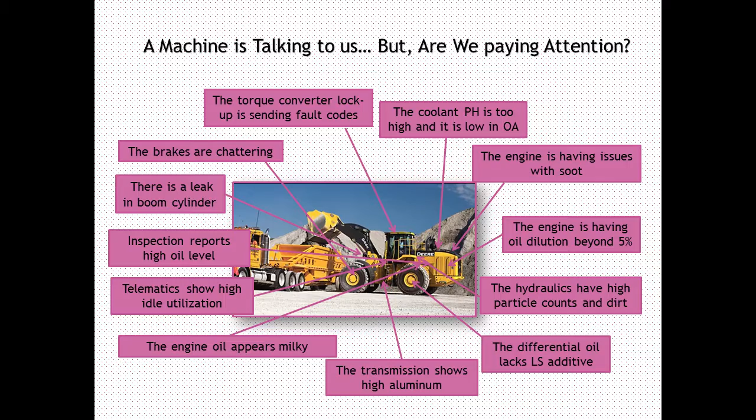My agenda today is to show you the changes in technology and how fluids have changed as well, and show you that fluid analysis is a very underutilized tool. I suspect everybody in this room uses fluid analysis. Is that the case? Are you satisfied with what you get from it? Are you getting your money back from fluid analysis? It's a powerful tool, but we are not getting the money back, and I'll show you why. My expectation is that you get acquainted with these changes, measure the challenges, and when you go back, try to implement some of them and figure out how to get better results from your fluid analysis.

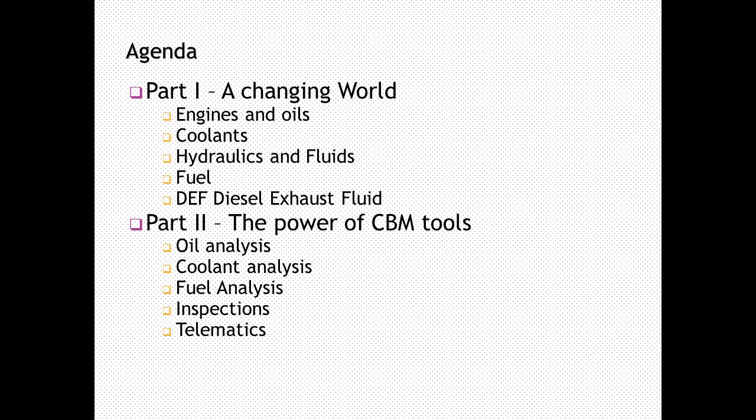The first part will show you the changes in engines and oils. I'm going to talk a little about coolants, hydraulics and fluids, fuels, and very little about DEF because there aren't a lot of issues to talk about there. My second part will show you the tools: oil analysis, coolant analysis, fuel analysis, inspections, and how to cross that with telematics. So what has changed in engines?

Let's talk about engines. We're right now in Tier 4, and over the last 16, 17 years we have seen changes manufacturers thought it was impossible to accomplish. The first stages of changing engines into emission engines were very scary, but manufacturers learned, and today they believe they can do it much better. Most of them started by moving the first piston ring to the top of the piston to eliminate empty spaces that produce emissions in the combustion. The same pistons were later manufactured of two different metals to resist the heat being generated.

Then we learned about the cool EGRs. EGRs are supposed to get some of the exhaust gases back into the engine, so we reduce the amount of oxygen. With this, we accomplish less nitrogen oxides. And then it needed to be cooled, so you recover the air mass and recover the power for that engine.

Then we had variable geometry turbochargers replacing wastegate turbochargers, just to provide enough air at different engine speeds, as well as twin turbochargers. Then fuel filtration—fuel is being injected at high pressures, so you needed to clean to very small limits. Then you have series turbocharging to really improve the amount of air provided to the engine at different speeds. Then you have the high pressure common rail that injects fuel at pressures 12 times higher than maybe 20 years ago, at very high speeds.

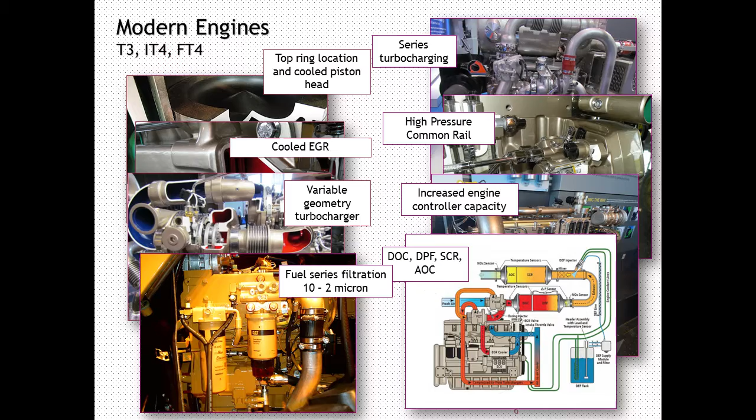Then you have increased power and controller capacity. Thanks to controllers, you can do a lot with pilot injection, ramp-up injection, and multiple injections. So you are squeezing the power of those engines using all kinds of tricks and devices. We are asking those engines to burn faster and still produce the same power, but with an exhaust that's cleaner than the air they suck in. Finally, the addition of diesel particle filters, catalysts, and after-treatments makes those engines extremely complicated, and we'll see why this also makes maintenance more difficult.

Pilot injection is feasible thanks to electronics, and what the industry is looking at is producing stoichiometric combustion, where you don't have a lot of fuel left or too much air unused. You have a perfect match of air and fuel, and for that reason engines run much hotter now, but much cleaner. Engines breathe better through additional valves, revised camshafts, and better turbochargers. So the room for mistakes has narrowed.

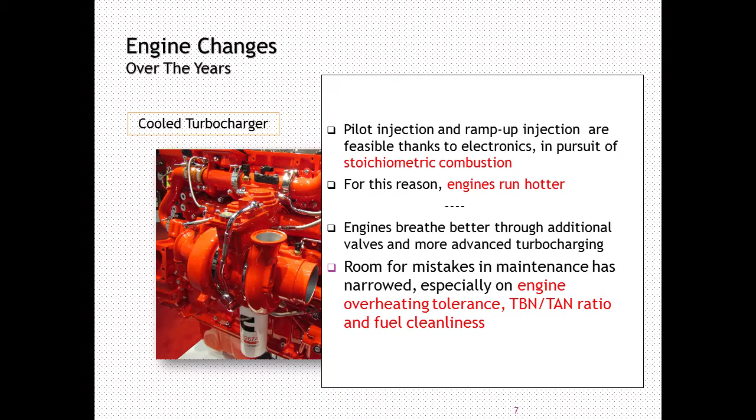We don't have a lot of room, especially on temperature. The overheating tolerance is minimum today compared with the past. TBN on the oil versus TAN has narrowed, they are running very close. And fuel cleanliness, we have no option but to run very clean fuels.

Fluids have changed as well in order to cope with these changes in engines. Oils contain less TBN and still need to protect the engine, be stable, and provide oxidation resistance. Oil has been used, and is being used, as a coolant. These new engines have almost double the amount of flow in the oil. The sumps are larger, the oil pumps are larger. We're using oil as a coolant.

Coolants, because of the added heat, needed to be different. Now organic acid coolants are the norm. And fuel is injected at very high pressures and at speeds that exceed more than 1,250 miles per hour.

Can you imagine that? So what injector is going to resist that? If you have any contamination at those speeds and pressures, you cause erosion. You also have high temperatures, which cause carbon deposits and varnish. All those challenges mean fuel needs to be extremely clean, more than hydraulic fluid.

Dilution could happen. Fuel dilution is a byproduct of technology. You cannot avoid it no matter what you do to your engine. And fuel relies on additives to protect the injector and the injection system. Not in the past -- in the past we ran fuels without any additives almost. Today, we depend on additives. And soot could be also a byproduct, depending if you work at high altitude.

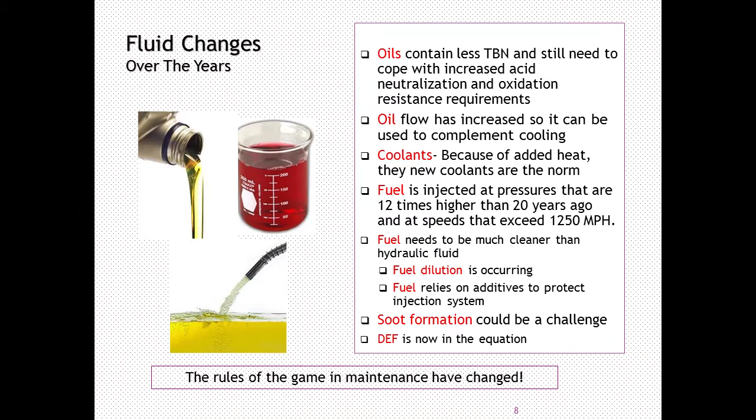So the rules of the game in maintenance have changed, and sometimes we forget about it and we keep doing things like in the past. DEF, diesel exhaust fluid, is also in the game, and we need to think about it.

When you talk about oils, the TBN has dropped. Oils today have less TBN, and we're supposed to change oil before the TAN, or acid number, exceeds the TBN. So new oils have less TBN, so we have less room apparently. But remember, fuel now has only 15 parts per million in sulfur, so we compensate on the other side. Basically, you can run the same hours with the same oil today thanks to that new fuel. But since these new oils start with much less TBN, today we have 9 TBN with the new oil compared to the old ones at 12 or more.

You have to keep an eye on the TAN, because if the TAN exceeds the value of TBN, you will have metal generation, and you'll scratch your head wondering where this metal is coming from. Why is that happening? There's no dirt, there's no fuel -- what's causing that? You need to check TAN. And TAN was reserved only for hydraulics. Well, now you may have to use it for engines as well. That's the new game.

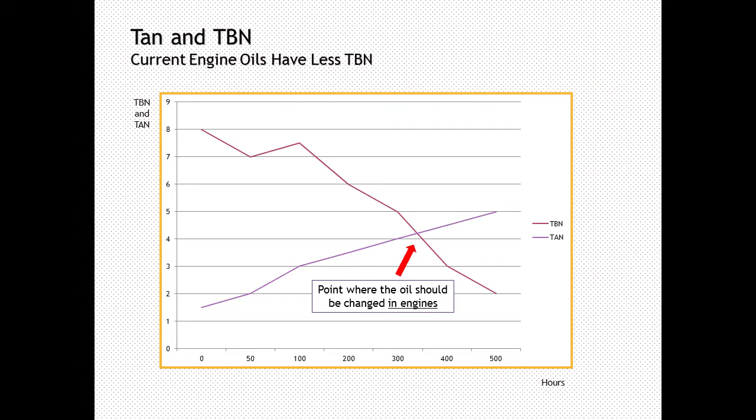When we talk about coolants, nitrite-based coolants were okay in the past, and helped us run heavy-duty engines and protect against cavitation. It worked with an anodic principle, where we created that yellow stripe protection for the liners. Well, that's not good enough with current engines.

We need to go to organic acid coolants, which we call cathodic. What it does is transform the ions, change polarity, and use those ions to patch the holes -- like when you patch potholes in the roadway during winter, they're patched in the liner like that. So new coolants provide that protection.

The question is, can you mix them? My advice is don't mix them, because you diminish the protection of the new coolants. It's better that you adopt the new coolants for the whole fleet.

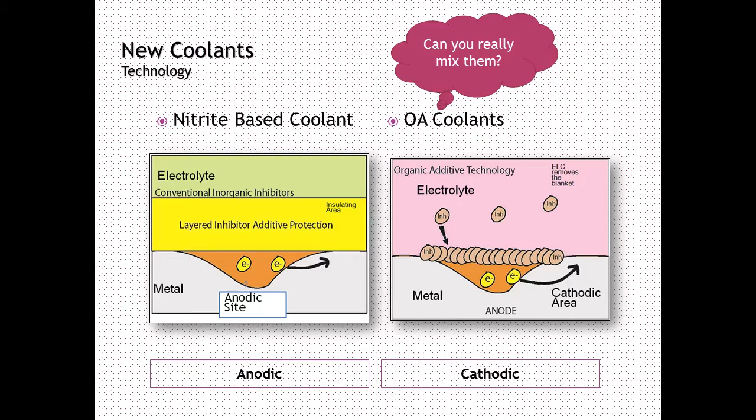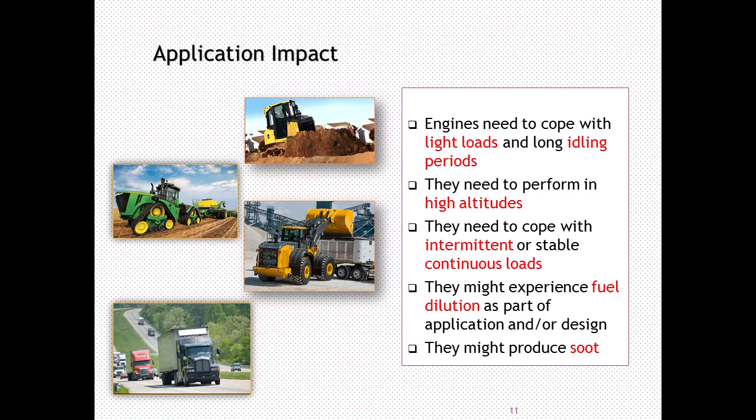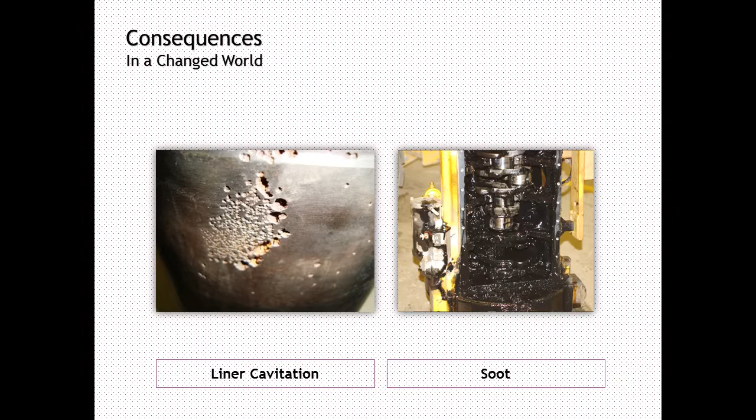Or you could have soot, like the pictures are showing. You could have piston delamination from high heat. Delamination doesn't happen every day, but if you have a plugged air filter, you increase the temperature in the combustion chamber, and you could cause issues like piston delamination.

Injector failure by carbon buildup or varnish is part of the game. If you remember the temperatures, if you don't use any additives, that could happen. Injectors are not lasting like in the past.

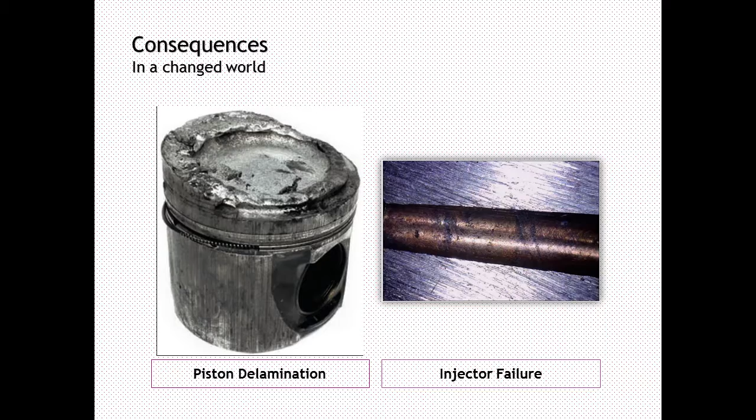So what are the areas we need to look for in engines? Temperature is a critical one. Air filters, we don't have room for dirty air filters anymore. Check for TBN and TAN. If you don't use TAN today, try to use it because you are going to need it.

Coolant types, remember the new type of coolants based on organic acid, long life coolants. Water hardness. Remember, the water we drink is good for human consumption. It's not good for engine consumption. If you test this water, it will have a hardness that is not good for the engine. We assume everybody is using pre-diluted coolant, but if you mix it locally with water from the tap, you are not helping your engine to survive.

DEF quality and contamination. We have to keep an eye on the DEF quality fluid you use and whether or not you have mixed it with fuel or coolant.

Fuel type, we mentioned that, I'll talk more about it. Watch for fuel dilution, coolant leaks, soot and dirt contamination. Especially coolant leaks are bearing killers. Coolant is the worst contamination you can have in an engine because you can lose an engine very fast. Watch for critical metals generation and watch for acid number.

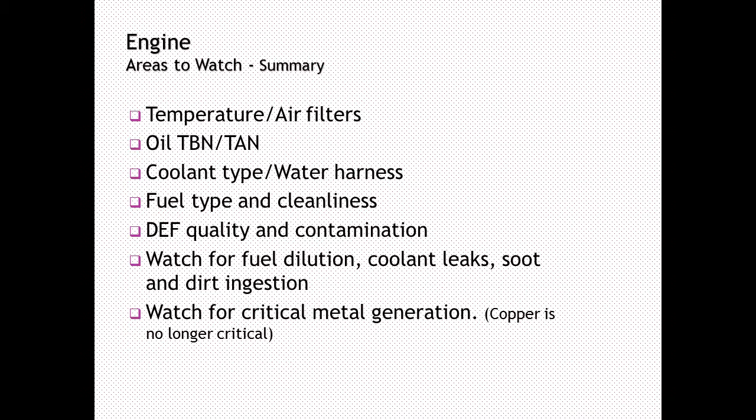Now, I'm going to switch gears to pass to hydraulics. I'm going to discuss it similarly with the changes in hydraulics. We don't talk about Tier 4 hydraulics, but hydraulics have changed anyway. And the changes are that we use smaller reservoirs. That's the fact. We need space in machines, so smaller reservoirs.

And what's the problem with a smaller reservoir is that you have less time to release the air and less time to cool the fluid. But we also have electronic controllers in hydraulics that follow the torque on the engine very closely. It means that the hydraulic system really sucks the whole power available from the engine.

High pressure tandem pumps are running at very high pressure, over 6,000 PSI. What happened with that? The competition to have the strongest machine in the market, the strongest arm and boom that can break the soil very easily, put a toll on arms and structures. So the key is making the arm last longer with those powers. It's a challenge for manufacturing because hydraulics are so powerful that keeping arms from breaking is becoming a challenge.

The use of attachments like hydraulic hammers is very popular. Remember, if you use the same hammer with different machines that use different fluids, you are already cross-mixing them, causing issues to both machines. And hammers are usually left in the open with the hoses on the ground without protection on the connectors.

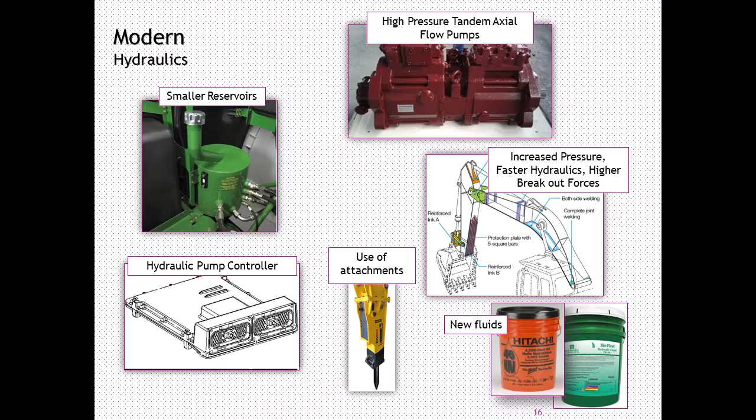So what things do we see in hydraulics? Increased pressures, smaller reservoirs, more environmental concerns with fluids, electronic controls, more power, and the room for mistakes in hydraulics has also diminished. We don't have a lot of room. These systems do not allow fluid cross-contamination. If you mix two different kinds of fluids, you will have to pay for it.

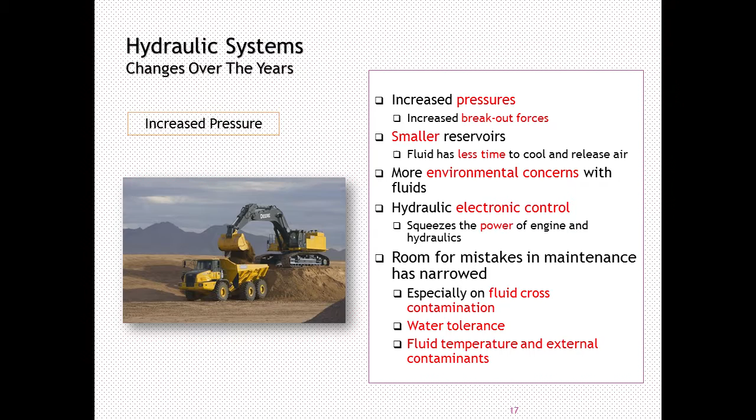Water tolerance in these pressures is minimum. Running at 6,000 PSI and close to 120 Fahrenheit, if you have a little water, more than 1,000 parts per million, you have a challenge with your pump. You have to watch for temperature as well as for water content.

These fluids I just mentioned need to release air in the time they have. The fluid usually stays in the tank only 20 seconds, so it changes the complete volume in 20 seconds. You need time to release air and time to cool it, so you need to keep radiators very cool and very clean, because of the high pressures and closer tolerances. The fluids need to resist those temperatures, and if you mix them, you are changing the nature of those fluids and creating a new product.

New fluids are becoming the norm in certain areas. They require biodegradable fluids, and biodegradable fluids are very tricky to handle. They take water easily, and it's hard to keep water out unless you use a bypass filtration.

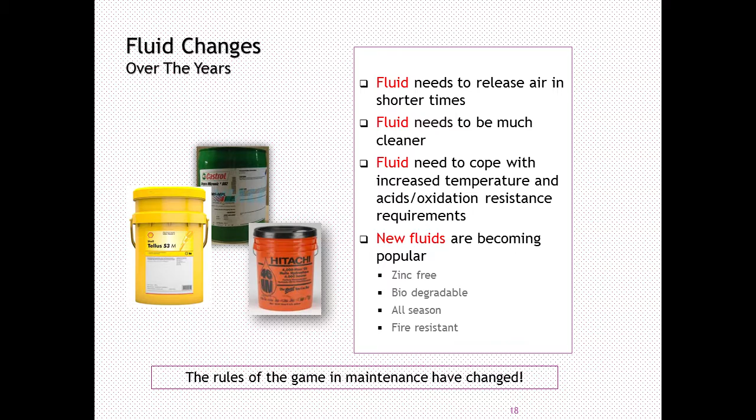There are zinc-free fluids today. They are biodegradable, they are all-season fluids, and they are fire resistant, and there are even more types of fluids being used.

When we talk about viscosities, machines can run on any kind of fluid, but the limiting factor is temperature and the season. Engine oil works, but engine oil is very heavy, and in cold weather it doesn't work.

Engine oils also lose viscosity very fast. You can have challenges with cold weather when you use engine oils or tractor fluids. So hydraulic fluids like 46 or 32 are very popular because they are very stable in viscosity loss, as the graphic shows.

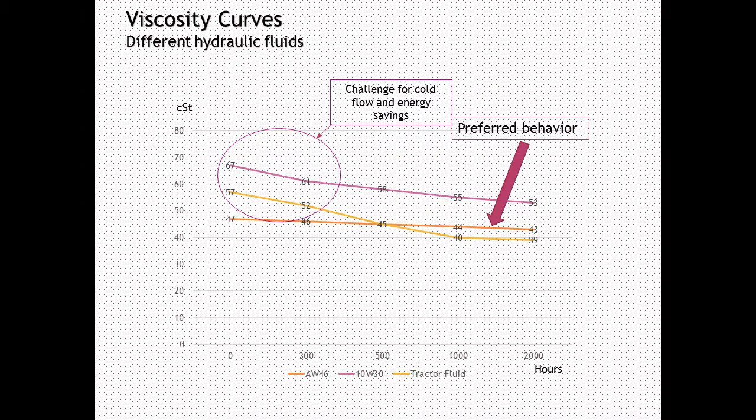When we talk about application in hydraulics, they need to perform in very cold weather, like the northern part of the United States, Canada, or Alaska. They need to cope with high loads.

They need to cope with humid conditions. If you do dredging or work close to the sea, you have to have a system that can handle hydraulic attachments like hammers, but also corrosive environments like you see in that last picture.

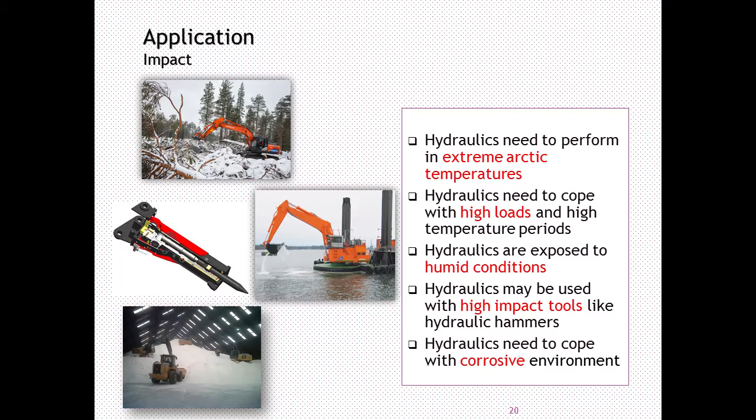All of those environmental situations get into the hydraulic system through the cylinders. No matter how sealed they look, you will get humidity and contaminants within the system.

You need to protect the heart of your system, and the heart of your system is the hydraulic pump. Hydraulic pumps usually have bronze alloys, and they can fail for many, many reasons.

At least I can list 12 reasons. So when you look at your oil analysis, look at copper generation, because that is the heart of your system.

In this picture, I'm showing a failure by etching produced by the lubricant, a lubricant that's very aggressive for the fluid. In the right picture, you have pitting produced by water. So they look alike, but they are different.

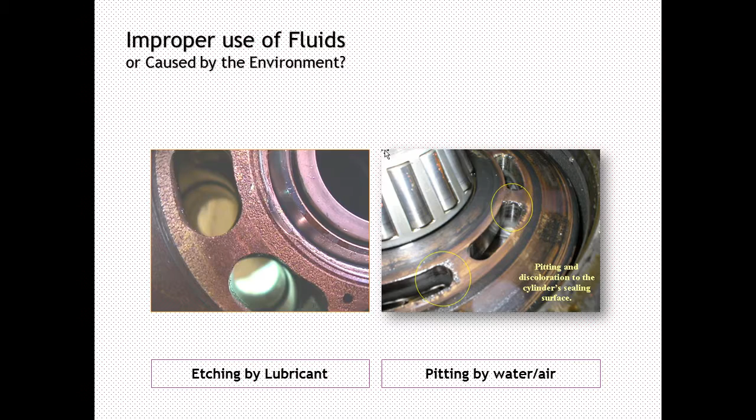As said, there are at least 12 reasons to produce copper, and copper is coming from the pump. So when we look at areas we need to be keeping an eye on in hydraulic systems, watch for mixing—don't mix fluids—watch for the signature in oil analysis, watch for copper readings because that's the life of your system, and watch for water using the Karl Fischer test.

I'll talk a little bit about that later. And be careful with attachments, especially hydraulic hammers and compactors, because of cross-contamination.

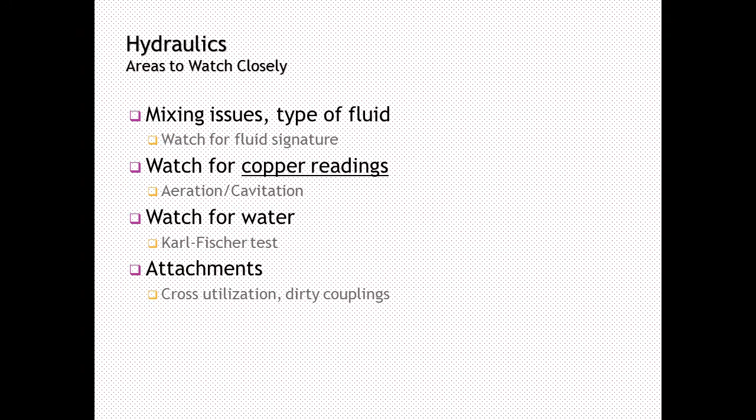Let's talk about tools. But the first thing about oil analysis is standard deviations. If your lab has not calculated your wear tables, what you're getting is perhaps too many warnings.

Or maybe you are not getting enough, but you are not getting the right amount of results. The median values in the calculation of standard deviations—Excel sheets can do that for you, but your lab should provide you wear tables based on the standard deviations.

In the example, 68.27% falls within one standard deviation, one plus and one minus, in total two standard deviations. That's how wear metals behave.

They produce that curve, that's a parametric curve, and usually we use that kind of calculation for wear metals. Other indicators are not used or calculated that way—only wear metals.

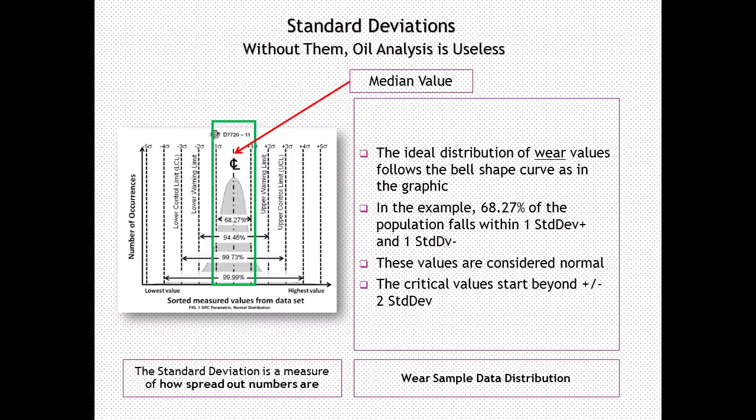And what happens if you don't have tables? Every machine is different. Even if you have machines working side by side, if they don't have the same engine, working the same conditions, doing the same stuff, you may need different tables. I mean, they are not identical engines.

Engines have different oil sump capacities, different kinds of injection, different controllers, different camshafts. So if your lab is using one single table to judge your whole fleet, it means you are not getting back your money for your oil analysis.

In this example, I have two machines, an 800 Hitachi and a 270D John Deere. The numbers are different—if you look at the numbers, iron is totally different, lead, copper, all of those are different. That's why different machines require specialized and individual tables.

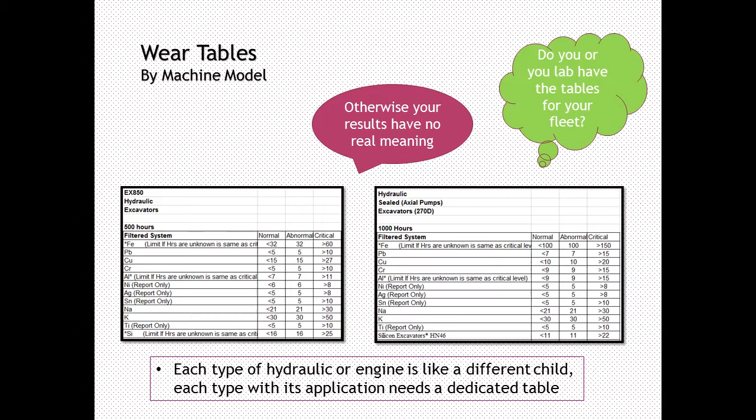Your lab needs to calculate those for you, or you won't get your money back, and the numbers mean nothing to you. You may be worrying too much, or maybe you don't get the right report when you need it. So my advice is: does your lab have those tables calculated for you?

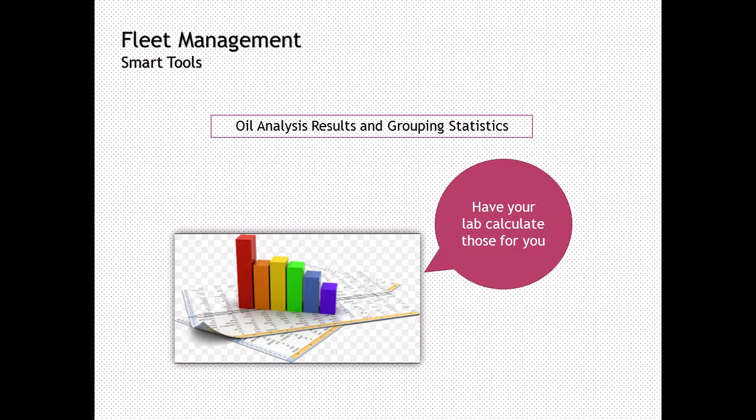When you have the oil analysis results, your lab can group them by critical, abnormal, or normal—different types of warning levels—and that allows you to address the ones that really need care. But you need to calculate your tables and have them ready for you. Otherwise, oil analysis won't work for you.

In this example, this is an engine with oil results showing a coolant contamination. I know that's a coolant because of the constituents—you have sodium and potassium, sometimes silicon from the coolant.

I know there is coolant, so the labs know about this, but sometimes it's more complicated than that. Labs are limited by the time they have to give you results. A lab analyst possibly makes a basic salary and is allowed 40 seconds to test and give a report. So how much are you going to get? You pay around $10-12 per oil analysis, and you have a guy with only 40 seconds to give you results. He's not going to spend a lot of time analyzing your results.

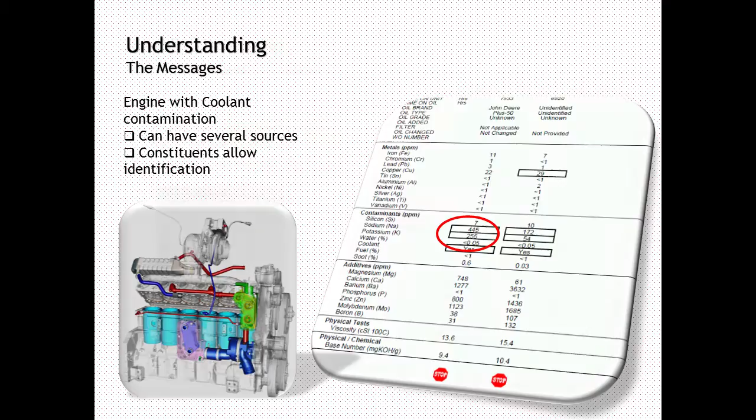Oil analysis is a powerful tool. I know there is coolant in that sample, but I can also know where the coolant is being leaked. I can find the source of the leak with oil analysis. In this example, there is a coolant leak, and I also noticed that the copper is minimum. That tells me the leak is possibly through liner pitting, not through the oil cooler. So oil analysis is a very powerful tool.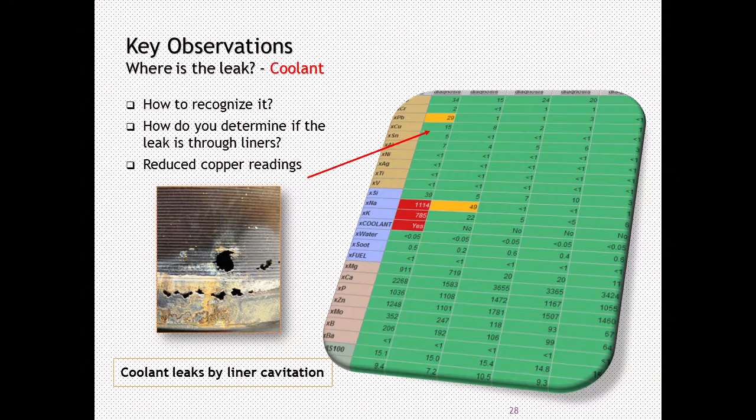So oil analysis can do much more than you can imagine, but it's a tool that requires a lot of knowledge. I don't know if the labs are going to develop the knowledge, but you have an option - you can develop the knowledge yourself.

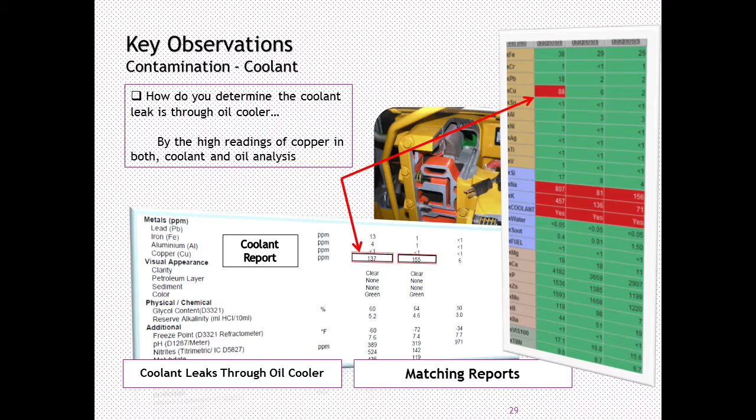Determining if you have a coolant leak, the question is: is it glycol or is it not glycol? Because coolant is made of sodium and potassium, where sodium could be coolant, could be dirt, could be salt, and potassium could be coolant as well, fertilizer, or soap - where the answer is difficult, right? And you think for $10 your lab is going to tell you exactly what it is.

They know the basics, but they don't take the time to go through this flow chart. Through this flow chart, I can determine that that's in fact a coolant leak. I can determine if the leak is through the oil cooler. I can determine if it's through liner cavitation. I can do a lot of things with a flow chart, but it tells me step by step what those readings mean. If we jump into dirt, we'll have the same situation. So the sign down there is exactly what I tell you - they're not going to the trouble of interpreting this for you.

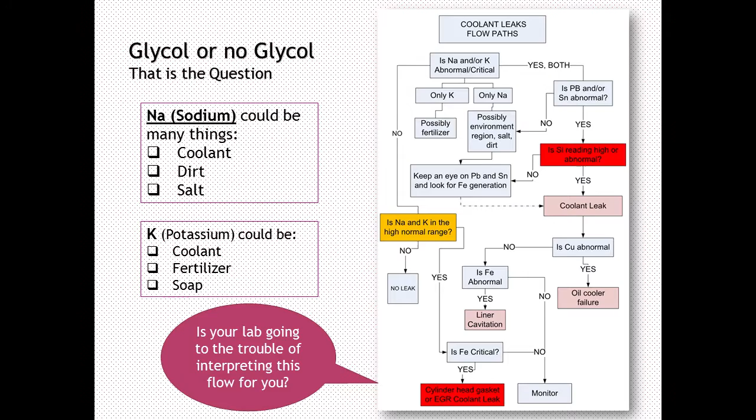The next one is dirt - dirt or not dirt. Dirt is represented by silicon and aluminum. But silicon could be dirt, silicon gasket material, anti-foam additive from the oil, or coolant silicate. So the interpretation becomes more difficult. And aluminum could be piston material, or it could be dirt. So how do you interpret the results?

Well, you also have a flow chart that can be used. A flow chart can tell me what this sample I'm getting is. Is it dirt? Is it gross dirt contamination? Is it silicate from coolant? Is it silicon from gasket material? Or is it a foam inhibitor? This flow chart helps me determine that.

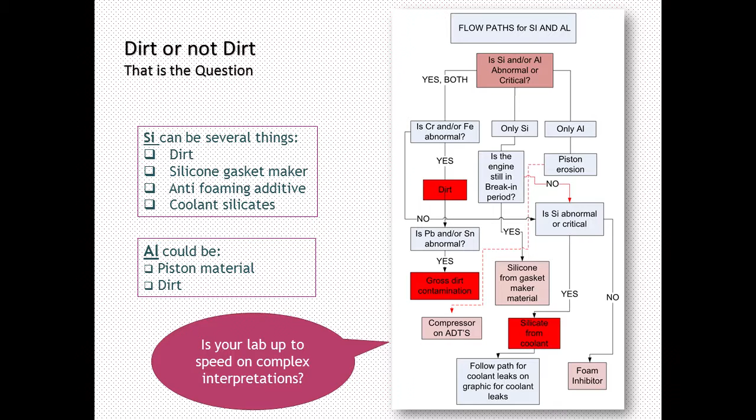I'm not trying to turn you into an expert oil analysis interpreter - I'm just showing you the power of this tool. So labs are not going to go into deep interpretations. A couple of them go beyond the call of duty and do a good job. Most of them are very precise in what they measure, but they don't have the time to go through this kind of explanations.

When we go to a hydraulic oil or hydraulic fluid analysis, there's a lot of things you need to know. Like in this example, is the copper reading normal? Is the silicon reading fine for this sample? If I don't have sodium, if I don't have aluminum or potassium, I need to know my fluid. That fluid on top shows it's a Shell Donax TD product, and I know it has a lot of silicon, which is a foam inhibitor.

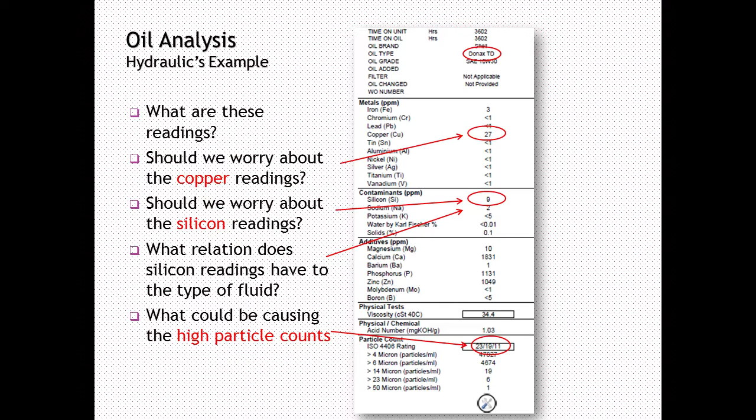Also notice that particle counts are very high. Why am I having high particle counts? If there's no dirt, why do I have high particle counts? So there's a lot behind the story, and we can know that particle counts are by themselves a whole science.

When you send your sample to the lab in a little jar, what you get back in metals and contaminants is only up to 6 microns in size - that's what the lab instruments can interpret. When you move up in size, they are hidden. You don't see them until they're big enough for the human eye to see, provided there's a good background. That's why we do particle counts, as you can see down there, because we can see from very small to very large with particle counts.

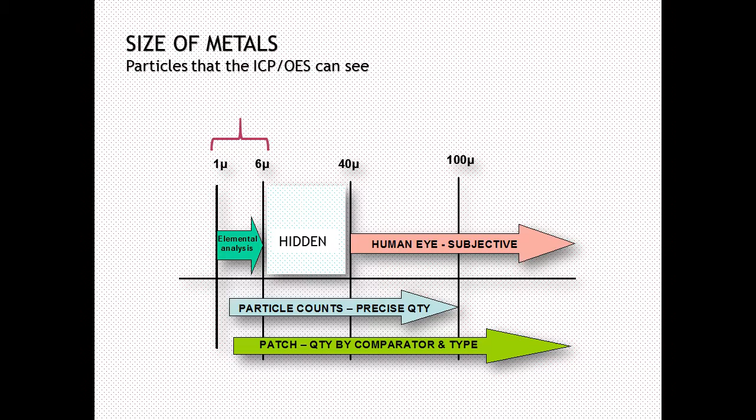Particle counts can be tricky because a mixed oil will have high particle counts, but you won't be able to interpret easily, because it's not dirt that's causing high particle counts, but gels. So this is the range of visibility to particles.

What about water? Water is very hard to see. Most labs offer the infrared test, and you pay for that. It's very cheap, but the visibility to water starts at 1600 parts per million with infrared. So if you have less than that, you don't see it.

And if you have a hydraulic pressure system at 6,000 psi, and you don't have visibility to water up to 1,000 parts per million, you are missing the boat. You are paying for nothing. You are not getting the visibility to the results. The Karl Fischer by co-distillation is the answer.

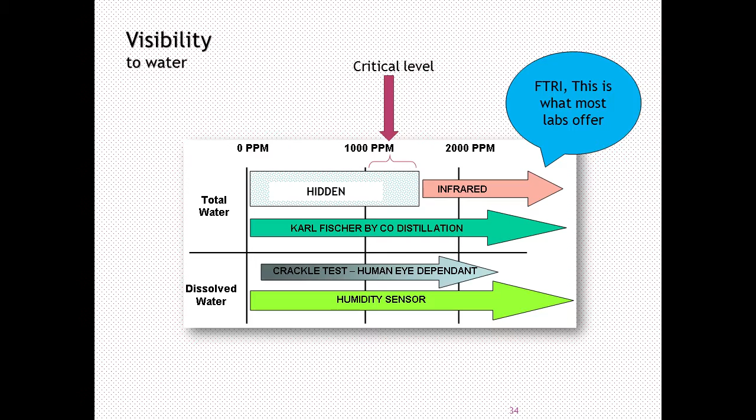Obviously, there are all the tests to check for water content, like the crackle test or the humidity sensor. But those are measuring only dissolved water, not total water. So Karl Fischer by co-distillation is the answer for that. Most labs use the infrared, and you won't have visibility. You are missing the critical level if you don't do Karl Fischer by co-distillation.

When we talk about dirt, dust, and water, this is an example, a hydraulic system where I have dirt confirmed because you have silicon, aluminum, and the ratio is 4:1, that is dirt. Also, in this sample, I have plenty of water. And if you don't have Karl Fischer, you won't see this water. That's the beauty of the Karl Fischer test.

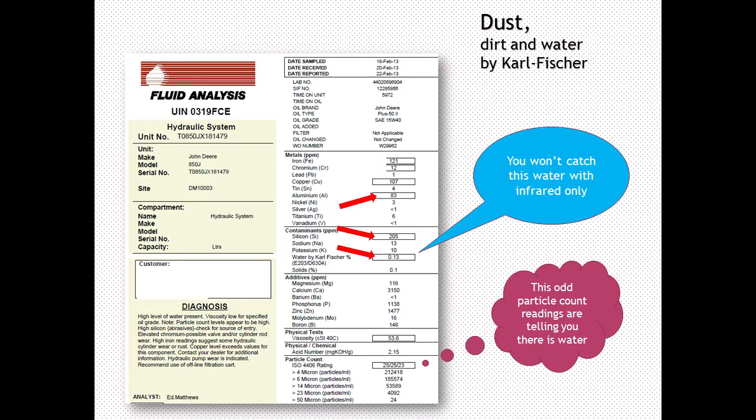And the high particle counts could be a mixing issue, or could be dirt. But particle counts are telling you, in this case, the numbers are 25, 25, 23, which is an atypical number, typical from a sample that has plenty of water.

When we talk about mixing or fluid compatibility, I have in that chart with colors: hydraulic fluid, zinc-free, hydraulic zinc base, universal tractor fluids, ATFs, engine oils in 2 different viscosities. As you can see, the no's are abundant. It's telling you you're not supposed to mix them. Remember, each fluid is developed through years of experimentation, and if you mix them, you create your own instantly, and it won't behave like you want it.

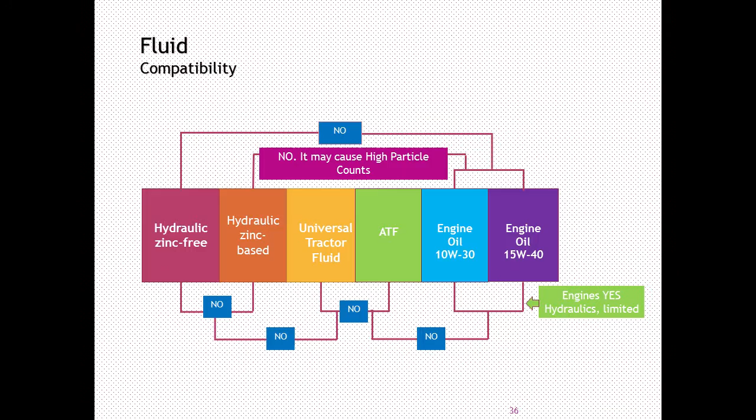When I talk about mixing, I mentioned the formation of gels. That's what happened - you create gels that reflect in particle counts. High particle counts could be gels, and the numbers are atypical. You can see this in 2 different fluids. I have examples of what you get.

When you have water, you have equal numbers. They are supposed to have 2 different code numbers and not 22, 22, 22. That's an issue when you have water in the mix.

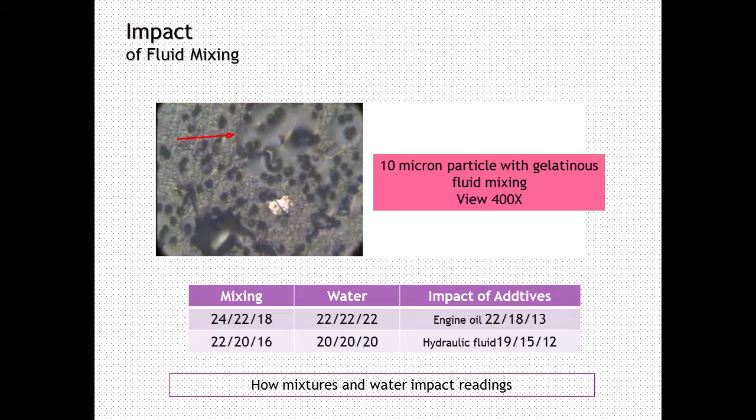Let's jump to coolants. This is an example of coolants. You have to measure your additives and you have to measure your water. This is a real example from a case I saw. This engine was suffering from corrosion, aluminum corrosion, and the results showed that he had no protection from the organic acid side of the results, and the pH was very high.

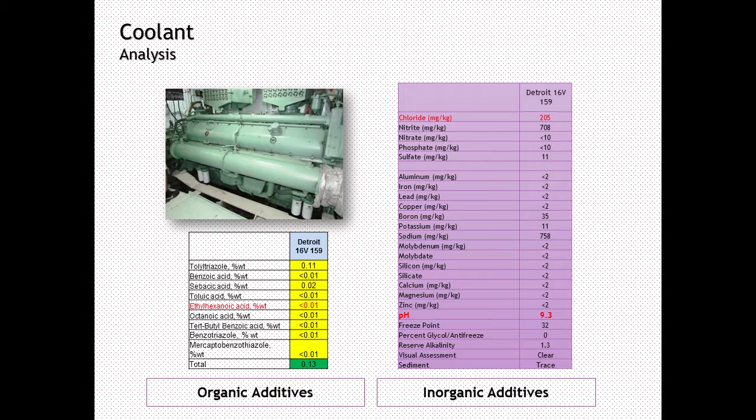The higher the pH, the more corrosive for aluminum the coolant is. So you have to test those, and you also have to test the water. I mentioned the water that we drink is okay for humans, but not okay for engines. Look at the results of that engine - the chlorates were very high as well. And if you look at the OEM versus ASTM specifications on what they want for chlorates, sulfates, and dissolved solids, those are the numbers.

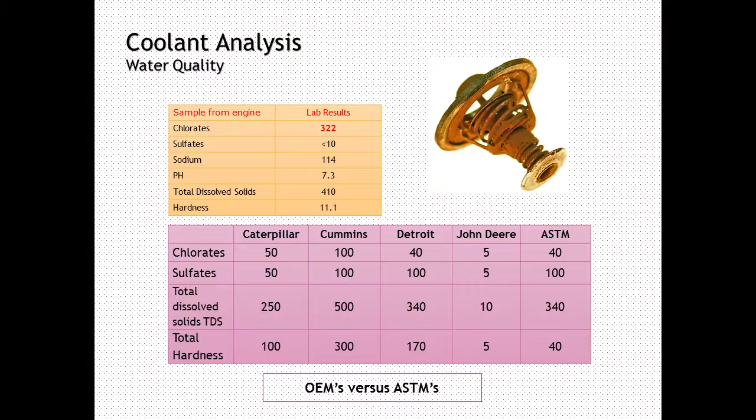And you can test those locally. I can test those for you in 1 minute with a 3-way stick, and they are very cheap. So you can test your water, but you can test your coolant with 3-way sticks, very easy, very cheap. And you know if you have the right concentration, if you have the right amount of organic acid additives, and if you have the right pH.

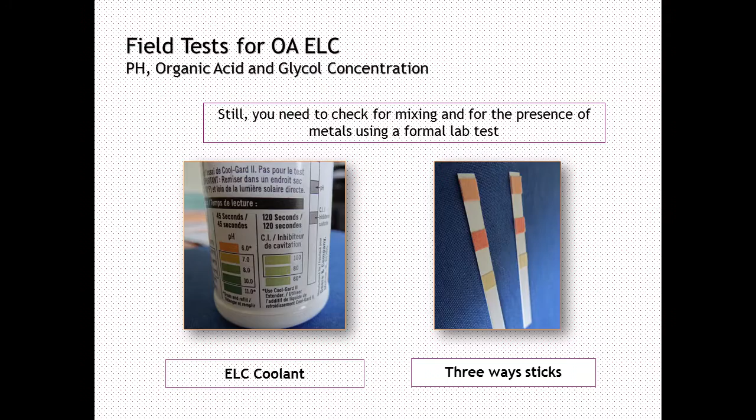When we talk about fuels, perhaps fuel samples are the worst investment because you don't get what you need. And the problem starts with yourselves, because when you send a sample, you send a sample that you took from the wrong place at the wrong time. And I'll explain it to you.

When you took your sample from your tank, your bulk tank, you need to take the sample at certain heights, and do it after refueling or not after refueling. If you do it after refueling, do it at the middle of the tank. But if you are not doing it after refueling, you have to do it at one-third below.

Otherwise, what you're sending to the lab could be crap. The lab will tell you this is good for nothing, or will tell you your fuel is clean. That's the problem. Catching the ghost, that's your task. Be able to catch a sample that is representative of what you're feeding your tractors or trucks.

With machines, what happens? The fuel gets cleaner as the machine works during the day, because 60% of the fuel that's not used by the injectors goes back to tank and is filtered again. So at the end of the day, the fuel in the tank is very clean. If you take a sample at the end of the day, what's the lab going to tell you? It's going to tell you that your fuel is very clean.

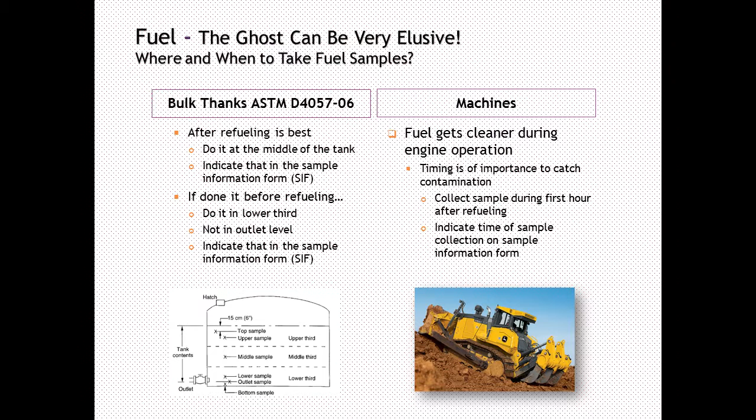But still, you have to do fuel analysis, because you could have bacteria, you could have a lot of particulate, you could have high sulfur fuels. It's funny, but high sulfur fuels still show up from time to time. You need to know your cetane index for easy starting in cold weather or high altitude, and you need to know how much biodiesel is in the fuel.

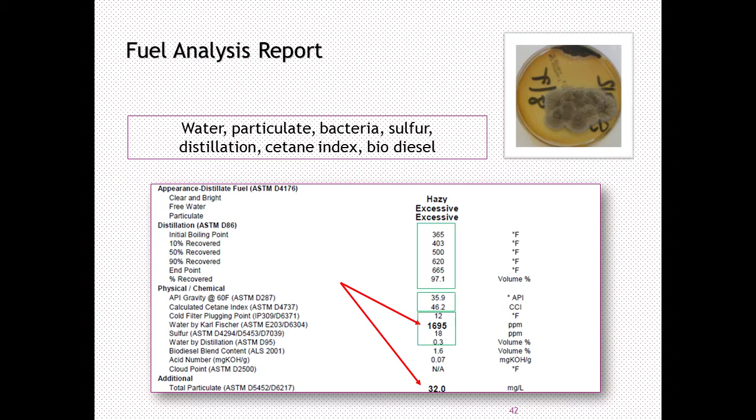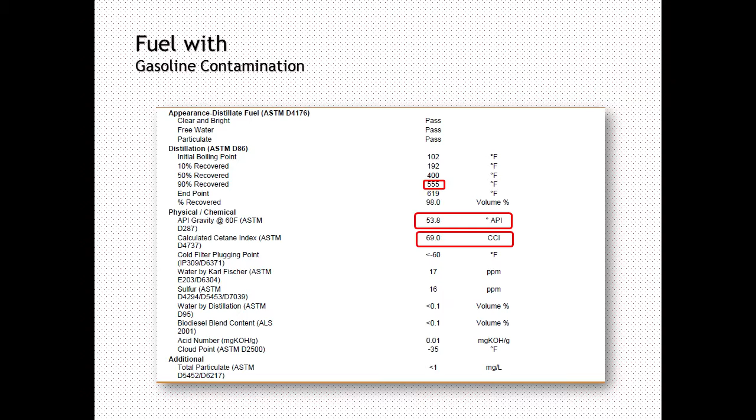You also need to know if you have a contaminated fuel. In this case, this fuel shows a cetane index of 69. Wow, with 69 you will burn that engine like a jet. That sample comes from a diesel fuel that was contaminated with gasoline.

I mentioned that fuels are no longer able to run by themselves. They need help, they need additives. You can have an additive that has lubrication and dispersion, oxidation inhibition, and all that. But you also have additives that are very strong solvents for engines that have already developed some kind of issue with injectors, for varnish or carbon deposits. Those strong cleaners help clean the injector, but think that an injector that's already giving problems is very hard to save.

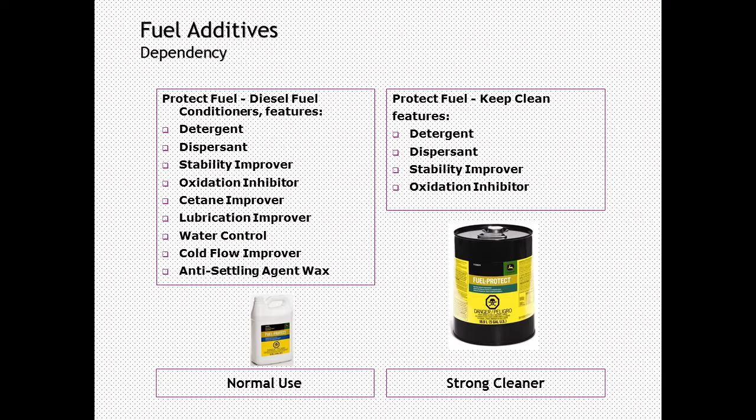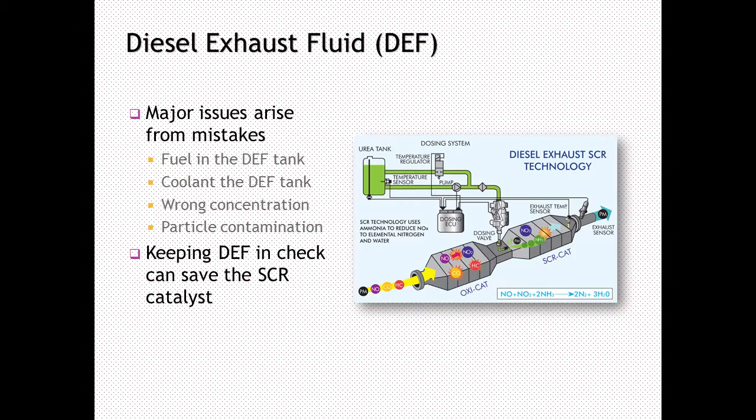When we talk about DEF, the diesel exhaust fluid, most of the issues come from mixing or filling the tank with the wrong fluid, but you could also have particle contamination. What happens with these issues is that it could be very costly, because it will poison your catalyzer. That's the issue with these mistakes.

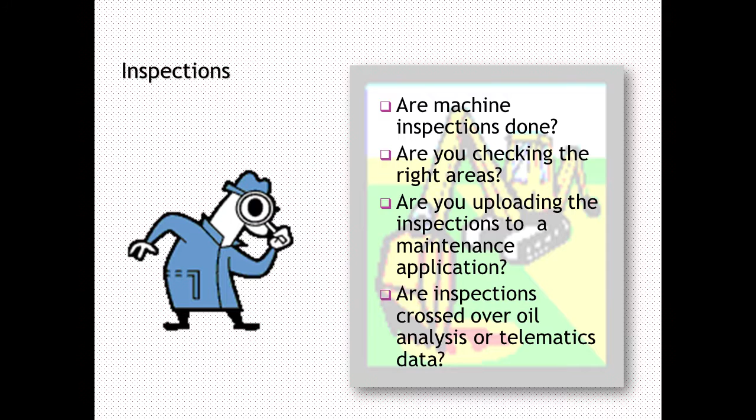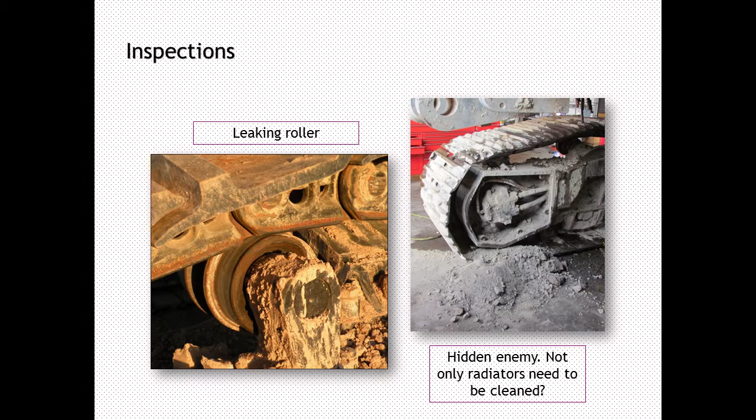Finally, inspections. Are machine inspections done in time? Are you checking the right areas? Are you uploading inspections to the machine maintenance application? Are inspections crossed over with oil analysis? Inspections are very powerful, provided we can interpret that and cross information. Like you have in these pictures, a leaking roller or a propel motor full of dirt. Those are reportable things that you need to know. The propel motor that's covered with dirt won't cool down as necessary, so that's a report that needs to be recorded someplace.

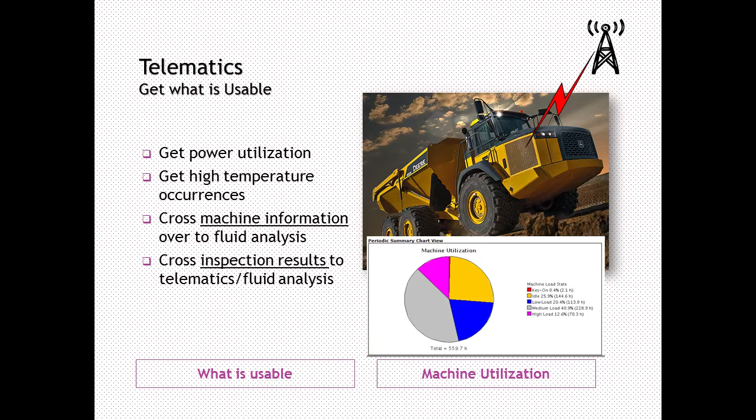And telematics. Telematics is very powerful. Get power utilization, get high temperature occurrences, and cross that information with fluid analysis. Cross inspection results, telematics, fluid analysis. Telematics is very, very powerful, provided we can interpret the data.

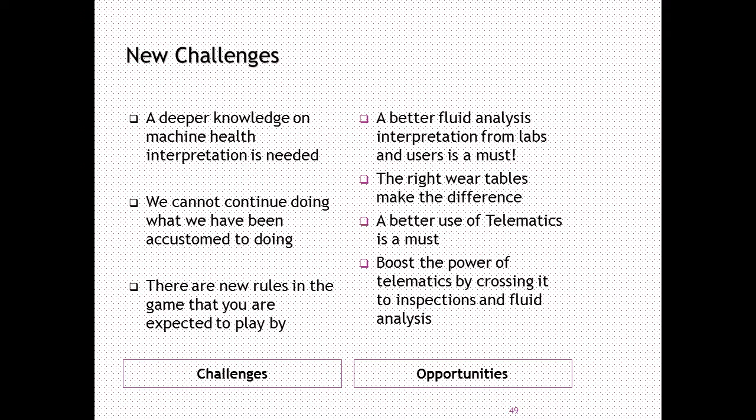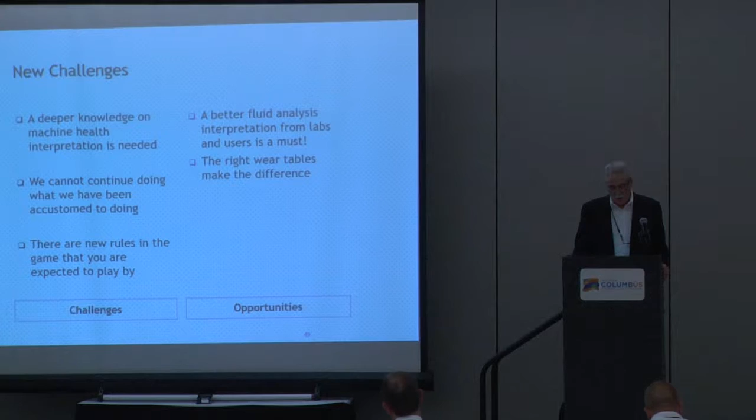So the new challenge is deeper knowledge on machine health interpretation is needed. We cannot continue doing what we've been accustomed to doing. There are new rules in the game that you are expected to play, and that's something we cannot change. The opportunity is that better fluid analysis interpretation from labs and users is a must. The right wear tables—think about wear tables, how to have the right tables that tell you the truth about your equipment. Better use of telematics, and boost the power of telematics by crossing it with inspections and fluid analysis.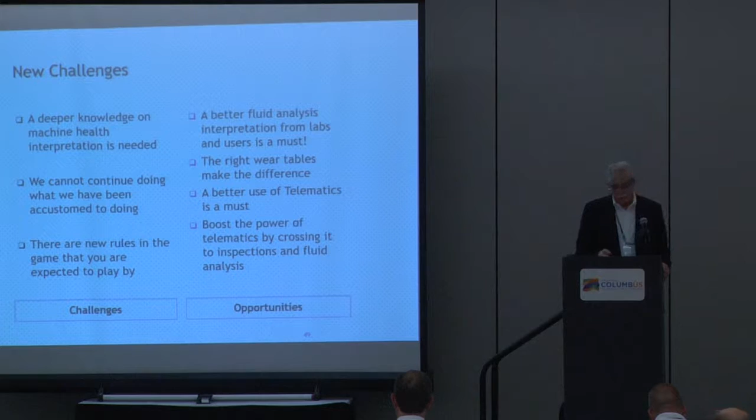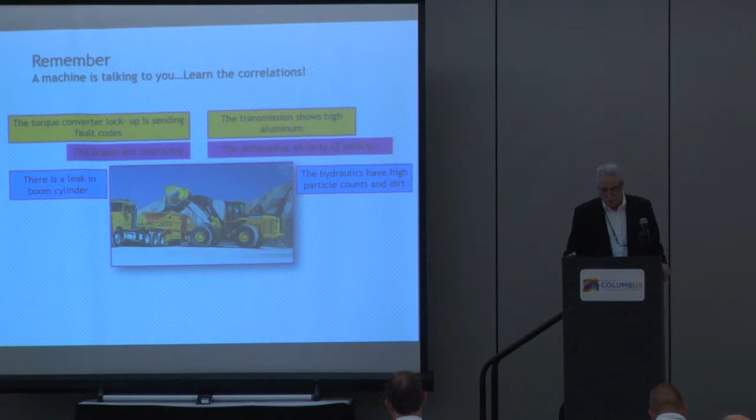To finish, remember, a machine is talking to us. You need to learn the correlations. The torque converter lockup is sending fault codes. The transmission shows high aluminum in the oil analysis results. The brakes are chattering. The differential oil lacks limited slip differential additive. There is a leak in the boom cylinder. The hydraulics have high particle counts and dirt.

Inspection reports high oil levels. The engine is having oil dilution beyond five percent. Telematics show high idle utilization. The engine is developing soot. The engine oil appears milky. The coolant pH is too high and it's low in organic acids. You have a coolant leak.

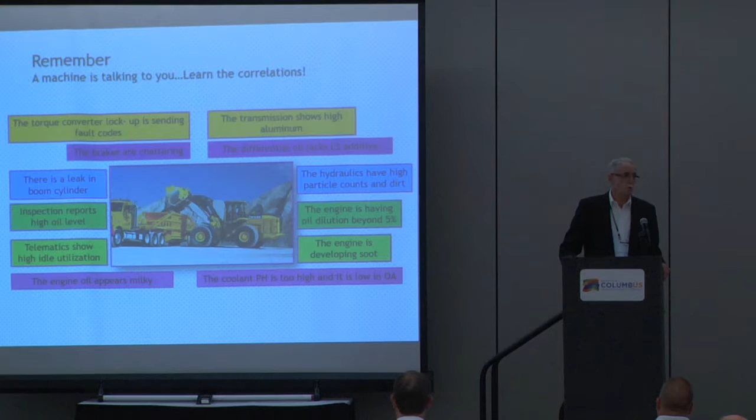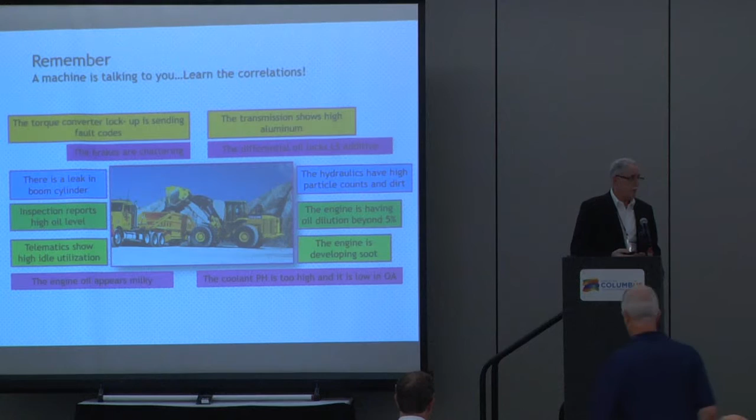I didn't have more space in the picture, I could put hundreds of those correlations. I just put those to show you that the correlations mean a lot, and we need to better use those correlations and learn those tools to really make fleets more usable or extend the life of equipment.

With that, I thank you for your patience with me. I ran very fast through complicated subjects. Thank you for your time.